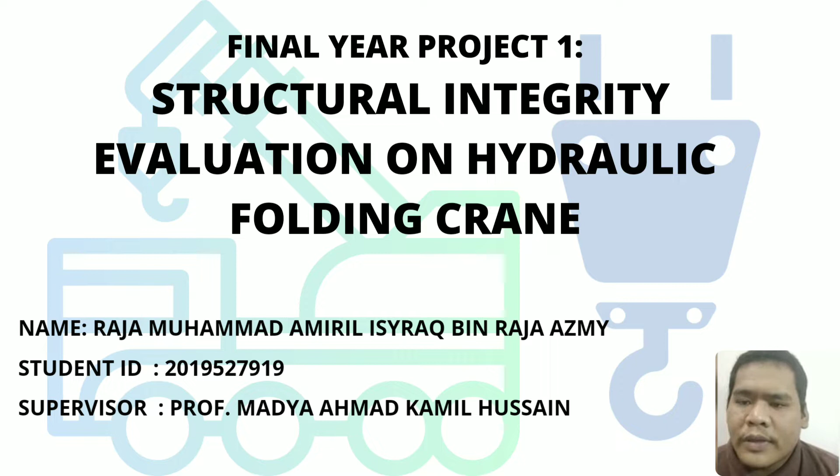Today I would like to present my final year project 1 proposal entitled Structural Integrity Evaluation on Hydraulic Folding Crane. This project has been supervised by Professor Madya Ahmad Kamil Hussain. I'm going to start my presentation with the summary of this project. Firstly, have a look at the project summary.

Due to the limit of human energy power, development of this equipment can overcome the problem in handling heavy things. It uses a heavy cantilever support structure to hold the engine in mid-air, so that the mechanic can carefully connect or disconnect fragile hoses and wires on the engines to the frame of the vehicle.

So the aim of this project is to evaluate the structural integrity of the hydraulic folding crane, besides to identify at what condition the critical stress will be applied on a certain part area. The package that will be used in this project is CATIA, to remodel in order to implement a finite element analysis on the selected part.

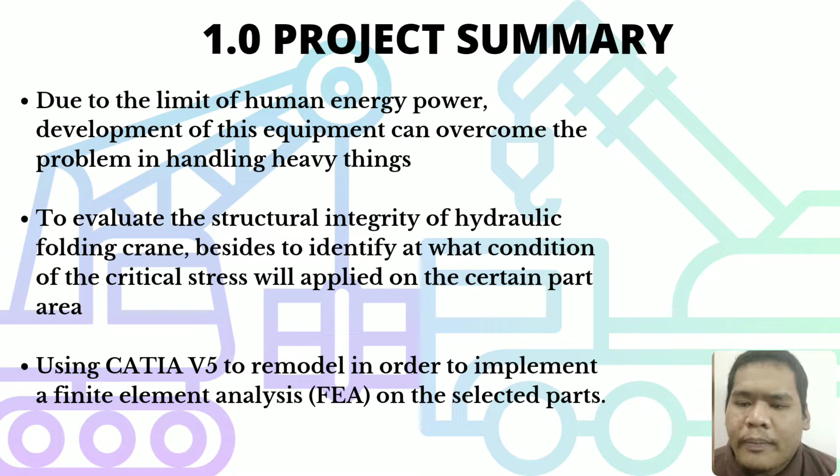Then we go through to the introduction. Hydraulic folding cranes are a common type of crane that are frequently seen in places like mechanic workshops and car repair shops. It also can be separated into several parts for storage and is easy to fold. The hydraulic cranes clearly can achieve a great amount of power with a small applied force.

There are some variants to all these tools, as they are not created equally and have different design, dimension, size, and capability to accommodate the weight of engines. Besides increasing the productivity for manpower, it also can manage to reduce the injuries that may occur to the operator.

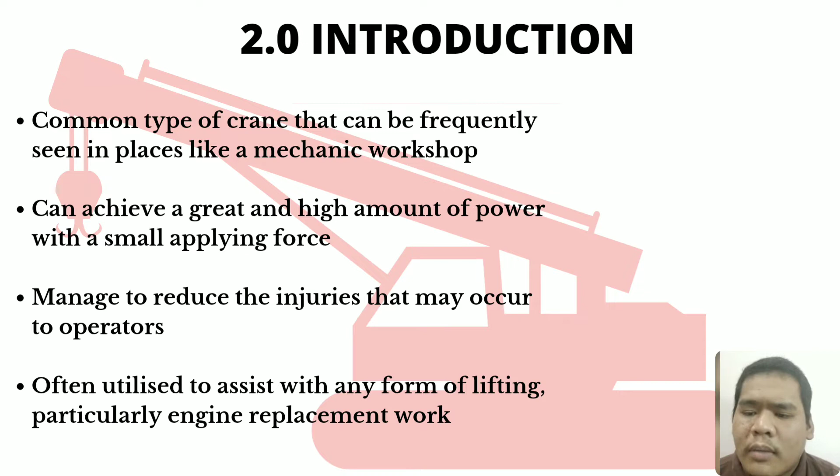We go to literature review. The lifting machine has advanced through numerous eras and times since the late 6th century BC, when ancient Greeks built the first crane for lifting such a great weight. During the Roman Empire, when building and construction reached tremendous proportions, the crane was at its peak. As a result, the Romans adapted the Greek cranes and improved upon them.

Then, cranes and hoists from the Middle Ages, as opposed to current cranes and hoists, much like their counterparts in Greece and Rome, were primarily capable of vertical lift. During the Industrial Revolution, the first modern cranes for loading goods were developed at ports.

Sir William Armstrong, an industrialist and businessman, created a hydraulic water power crane in 1838 that was employed as a ram in a closed cylinder that was pushed down by pressure fluid entering the cylinder. As a result, the cylinder's valve controls the amount of fluid intake in relation to the crane's load.

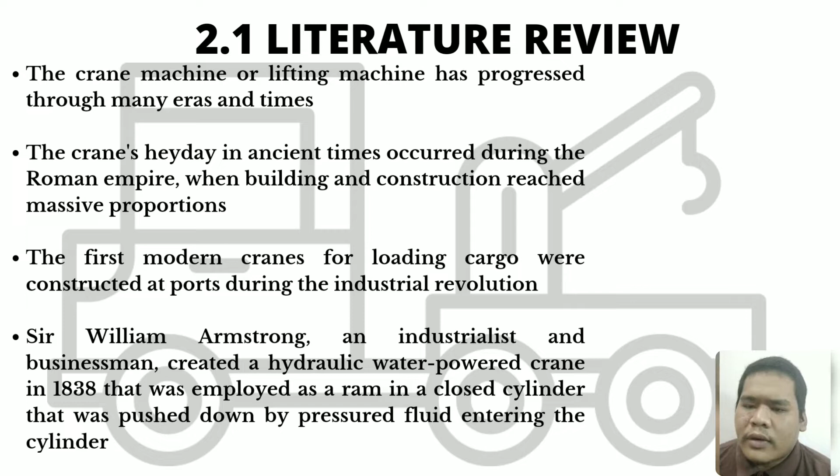Then we go to the capability of the crane. Engine cranes are usually made of heavy-duty metal and can lift loads up to 4 tons. Smaller engine cranes can lift up to half a ton, whereas larger hoists can lift up to 8 tons. Engine cranes can be utilized with nearly any car engine because the majority of today's cars use V4 and V6 engines, which do not exceed the 2 tons weight constraint.

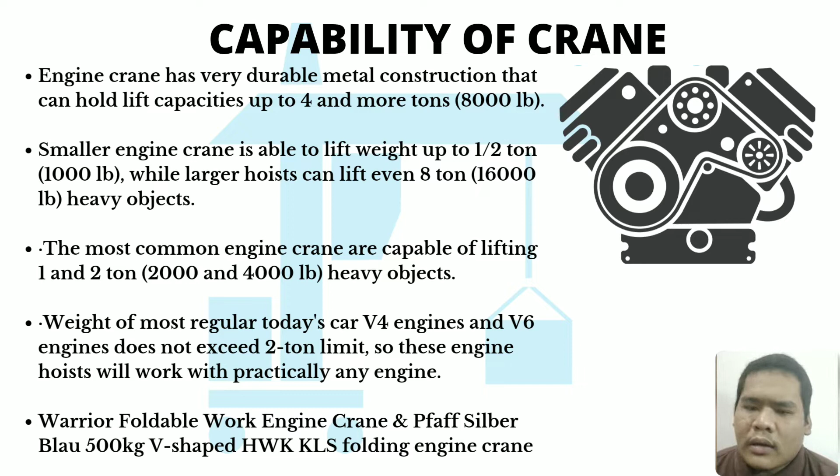The Warrior foldable work engine crane, for example, is currently on the market and has a weight capacity of either 1 ton or 2 tons, making it suited for various heavy-duty operations. Meanwhile, the Pfaff Silber Blau 500 kg V-shaped HWK KLS folding engine crane has half a ton weight capability for a smaller crane.

For material selection, the first part is the vertical columns and base, where the compressive force is concentrated on the vertical column. As a result, cast iron was chosen as the material for the column since it has superior casting, can endure high compressive stress, and is without doubt inexpensive. Also, the primary elements are carbon and iron, with carbon content of 1.7% up to 4.5%.

Secondly, the adjustable and extended booms. The material utilized to construct this component must be robust and durable due to the enormous load given to them. Hence, the best material selection for this component is structural steel, which contains carbon up to 1.5%, resulting in increased hardness and strength.

Next are the hook and chain. Because this component is subjected to a lot of tensile stress, wrought iron is the best material to select because it's malleable, robust, and has a lot of flexibility. Also, it has carbon content of 0.02%, 0.12% silicon, 0.018% of phosphorus, 0.07% of slag, and the rest is iron.

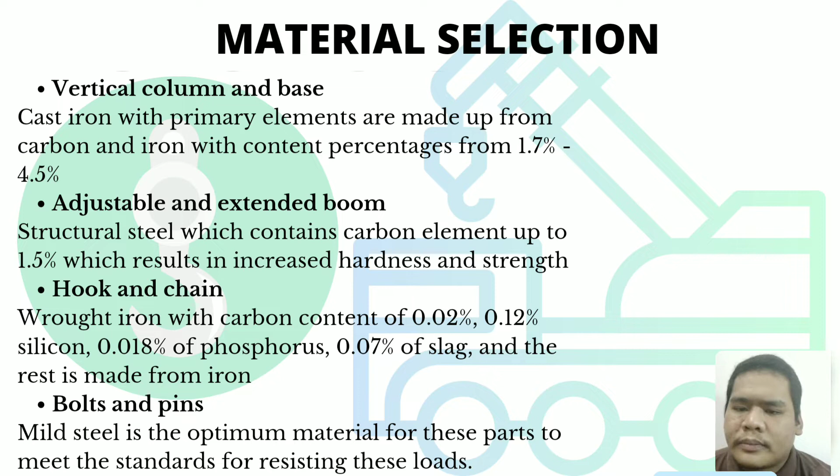Then we go to the problem statement. There are plenty of possible failures that may occur if the equipment is not handled properly according to procedure. For example, the optional choice to extend the boom to the desired length does not match the required weight and size of the engine, which can consequently make the crane flip over or become unstable.

Furthermore, the attachment between the hook and engine is not on a symmetrical axis, so the engine load stress cannot be distributed uniformly, which provides extra stress at certain areas that shortens the lifespan of the equipment. Also, the common area space of a car repair shop or another average workshop is mostly not suitable for an overhead crane or for transporting heavy duty components using a forklift.

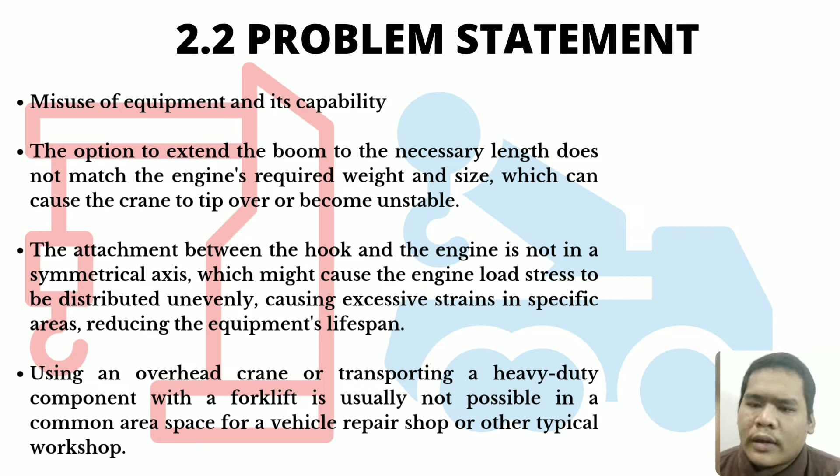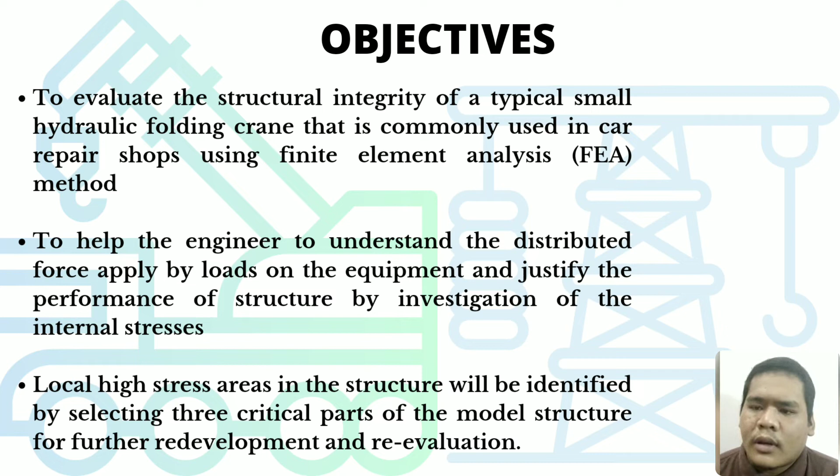Then we go to the main objective of this research, which is to evaluate the structural integrity of a typical small hydraulic folding crane that is commonly used in car repair shops using finite element analysis. Next, the purpose is to help the engineer understand the distributed force applied by loads on the equipment and justify the performance of the structure by investigating the internal stresses. Lastly, the local high stress areas in the structure will be identified by selecting 3 critical parts of the model structure for further development and evaluation.

We are going to the scope and limitation. In this project, the structure to be researched is a folding crane that can carry a large load up to 2 tons. This crane has 2 side bars that are connected to produce 2 links and a pin joint connected with the base. Using a proper bolt connection, the vertical column is fixed on the welded cross that forms the base.

The selected crane has 6 wheels, 4 of them located at the front and back ends, while the other 2 are located beneath the vertical column that connects the boom and the piston cylinder. Because the crane is hydraulic, the engines are lifted, and the project modeling should not be overly complicated, but should not be simplified more than the actual functioning. A model structure of the chosen folding crane is included during the modeling.

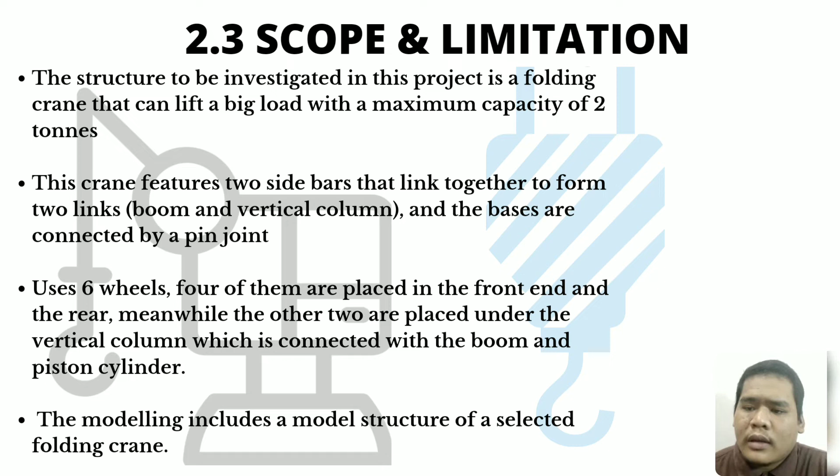Then we go to the methodology, where the procedure starts with identifying the problem and then moves on to conducting a literature review to determine the extent of limitation and specification. When the demand has been narrowed down to a more particular scope, the hydraulic folding crane is modeled using CATIA software with the proper dimensions. Following that, the critical parameters should be established to ensure that the chosen equipment can withstand high loads. Using von Mises analysis, the study is done to forecast and estimate how much stress is applied to the specific area so that improvement can be made in future research.

At the end of the process, the parts were examined to see if they meet the requirement for the loads accommodated and will not collapse over time. As a result, all of the data was saved for future development and review.

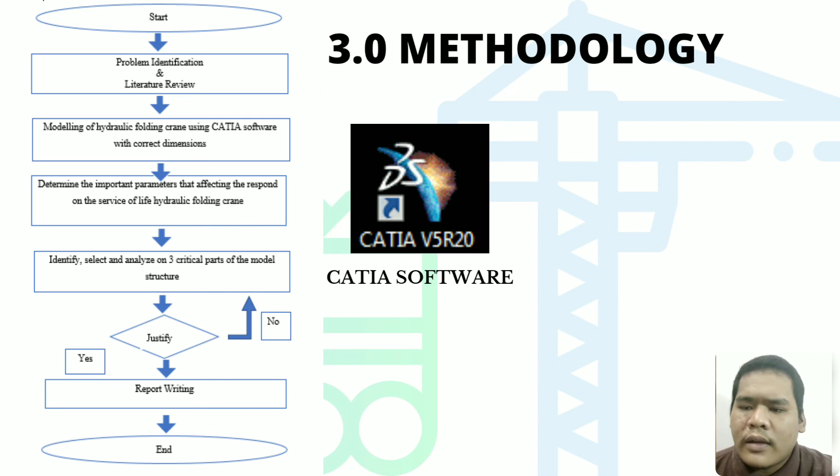Then we go to the expected result. The full assembly of the crane model is expected to be obtained as a result of this project, which consists of a combination of different parts that have been modeled separately, including the main body frame, adjustable boom, extended boom, hydraulic piston, support bar, wheel, and bolt and pin connecting joints. The dimensions used for each part, so that it can meet the requirement and tolerance at the connecting region, are the major consideration for the assembly process.

Also, by utilizing von Mises stress analysis, specific sections will be studied on 3 selected elements that consist of the adjustable boom, hook, and main body, as they were projected to be potentially crucial parts of the entire assembled model structure. The factors or parameters involved with the stress, including length, are attached.

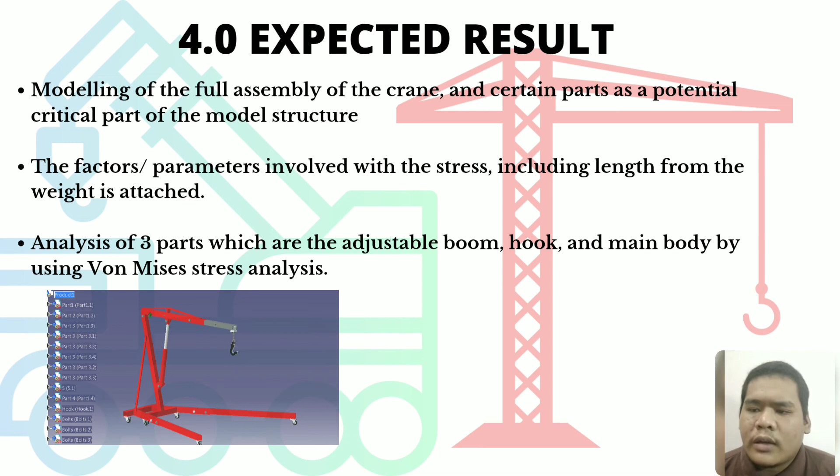Then we go to the last part, which is the preliminary outcome, where stress analysis was important to understand the behavior of the structure when a load is applied to it. Von Mises stress analysis became a parameter to compare strength between different designs and parts of the hydraulic folding crane. The structural integrity evaluation is a method to verify stress in the structure when it is subjected to load. The selected part experienced complex loading where the body had normal stress and shear stress. The von Mises stress boils all the complex stresses down into a scalar number.